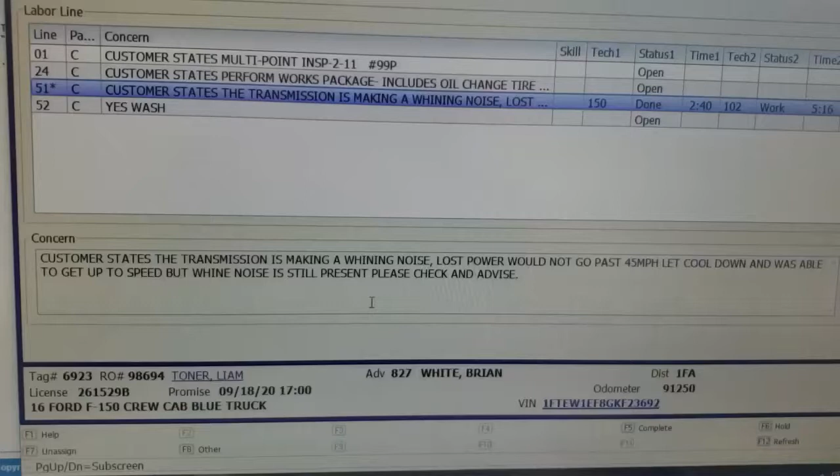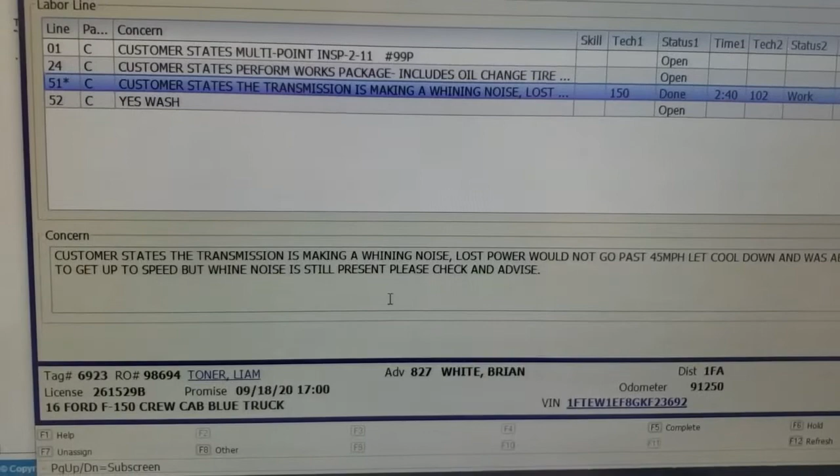Okay, so today we are going to look at a truck. The customer is complaining of all kinds of weird transmission concerns, won't go over 45 miles an hour, whining noise, and all that. The transmission guys already looked at it and decided that there's something wrong with the engine. So we're going to investigate that here for a minute.

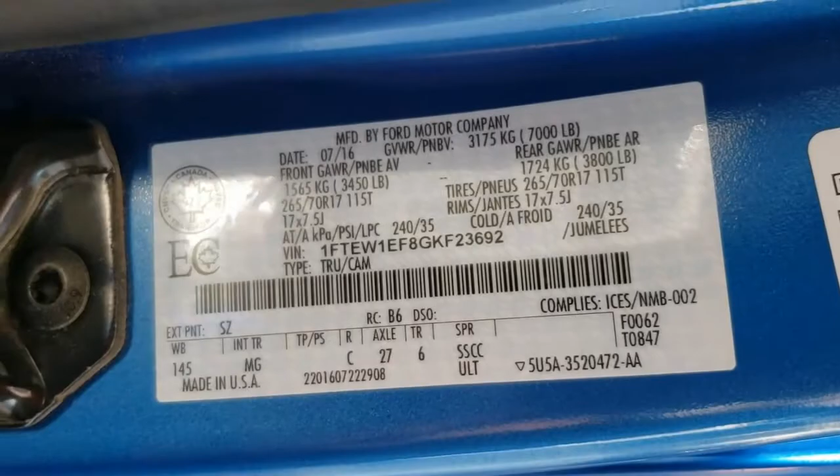Like I said, it's a 2016 F150. There's the VIN tag for your test sheet. And she has 91,253 miles on her.

So where I wanted to start with this truck would be we want to pull codes, and I thought that today would be a really good day to take some time, and I'm going to show you how to hook up the IDS and what the IDS is all about. IDS stands for Integrated Diagnostic System. In other words, we're integrating all kinds of different things into one diagnostic tool.

We have the ability with this unit to just pull codes and look at PIDs and look at stuff in the computer, but we also have other units that we can hook up to this system so we can check pressures and voltages and all kinds of different things. The purpose of this class is not to try to teach you everything about the IDS itself, but I wanted to give you guys a rundown for you guys who have not done this before.

So let me start with a hookup, and then we'll come back around here and we'll talk about how to program it into the computer.

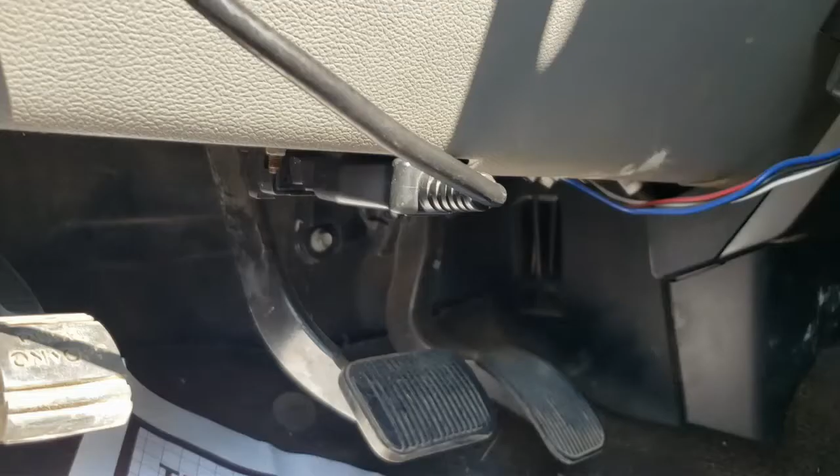So from inside the vehicle, every vehicle built since 1996 is going to have what they call a DLC connector. That's a data link connector. It's a 16-pin connector. It's the same connector for all manufacturers. Not all the pins are the same for every manufacturer, but there are certain pins that are, and we can discuss that in a different class.

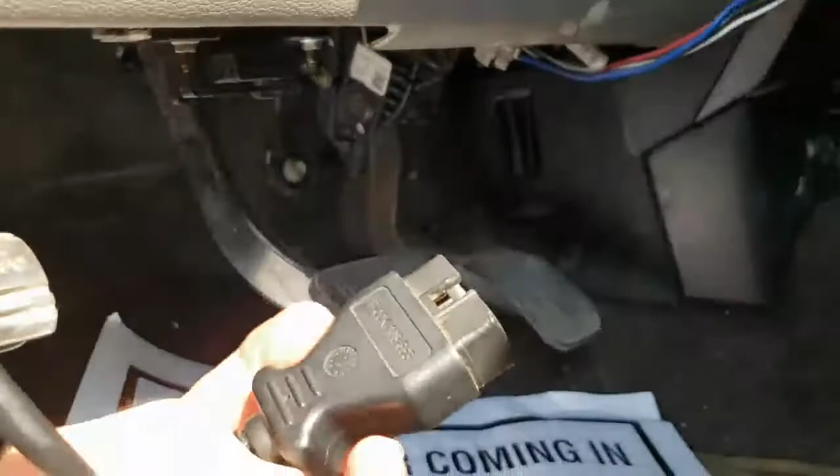But we have the connector here from our IDS system. We're just going to simply plug that into the car. We're going to turn the key to on, which I've already got it on, and then we're going to go out and I'll show you how to boot this thing up on the car.

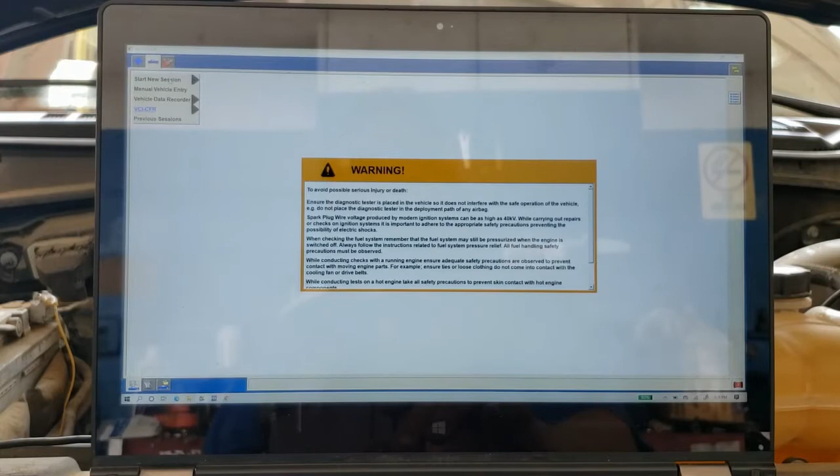Okay, so it's really simple. All we're going to do is we're going to come to start a session and all other vehicles, and enter. Wait for it to do its thing, and it's going to boot itself up on the car.

Okay, it'll pop up and say what car it's booting on up to, and then it's going to ask the question, is this correct? If it's not, it's going to assume that there's something wrong with the programming and kind of take us down a different route, but we don't really care about that right now. We just want to hit yes. This is the car that we're looking at.

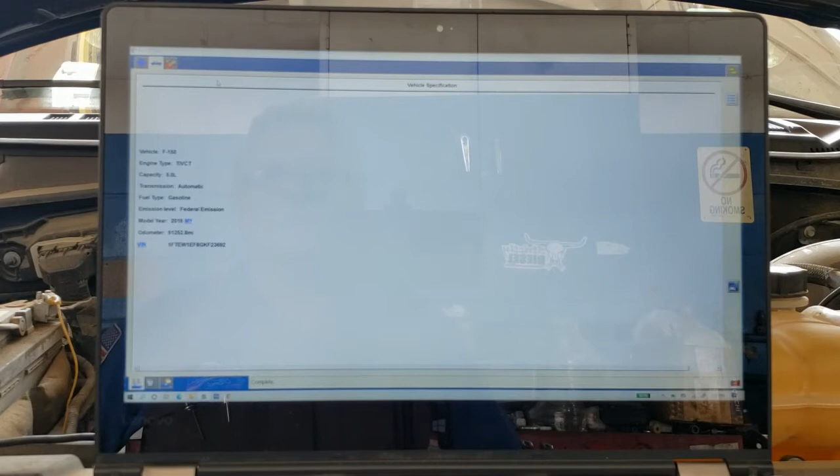Okay, so now we're booted up on here, and you can see that it is an F150 with a 5-liter with the TI-VCT. That's the type of VCT controls that are on there as far as variable cam timing. It's federal emissions, in other words, it's not a California vehicle. It's a 2016, and it shows the mileage and the VIN number.

Okay, so from this menu we can pick the toolbox, and we have lots of things that we can choose to do with this car. Easiest of which is just to do self-test on the vehicle. We can self-test all the different modules, or we can do a continuous code or continuous tests to all the modules, or we can come back up here and we can look at the data stream and see what's happening with all the different parameters in the car. We'll cover that a little bit later.

We can monitor the network. We can program the module. We can do network tests. We can do all kinds of powertrain tests, which we'll get into later on this semester. We'll cover some more of these. But for the purpose of this, I just kind of wanted to show you how to boot up on here.

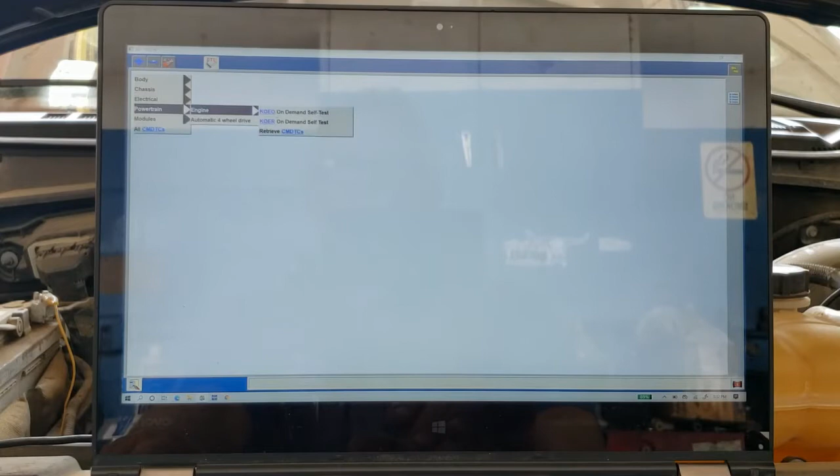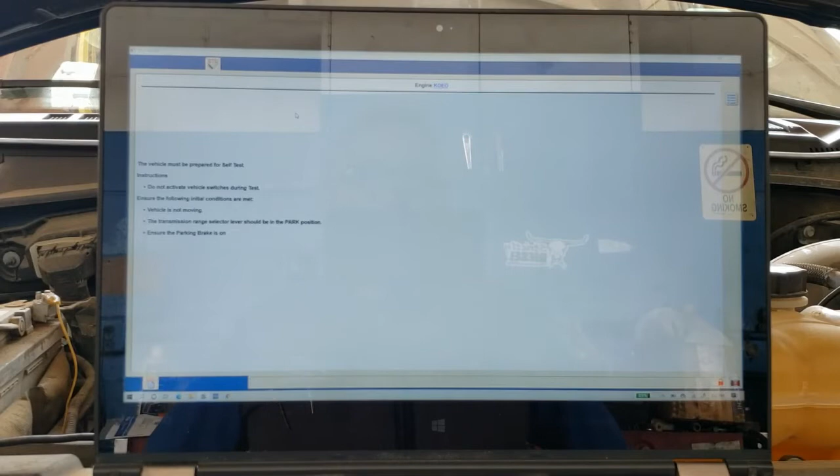So what we want to do right now is we're going to do a self-test. And I want to do a self-test particularly right now on the engine itself. So we can choose on-demand self-test and hit enter, and then it's just going to have us go through a series of preparations for the vehicle, make sure that the AC's off and nothing's in gear and that the car's not running and that kind of stuff. It'll just tell you what it wants to do. So now we're going to go through a self-test.

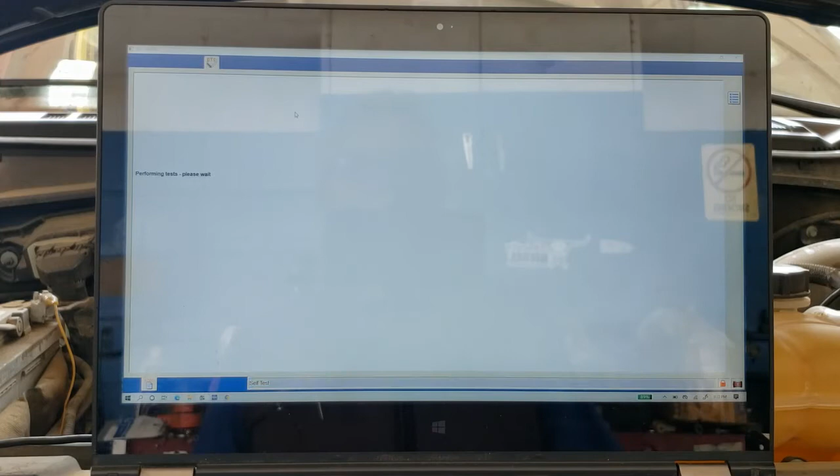Okay, you could hear it ran the cooling fans during the self-test. It went through a whole series of stuff inside the dash. But here we are, and what did we end up with?

Well, obviously I didn't turn the air conditioner off, because the top code here is the AC was on, so we can ignore that. But we have a continuous code P06DD, which says the oil pressure control circuit performance is stuck off.

Now we need to go to the workshop manual. We're going to work through that particular pinpoint test and find out what that means.

Up on the top, when we do our IDS self-tests, it's going to show us if this code has any TSBs associated with it. It's going to pop them up so we automatically know there's a bulletin on this, some kind of problem that Ford knows about.

But if we just read the literature on that, it says 2016 to 2017 F150 with a 2.7 engine. But as we recall, this car is a 5-liter, so we know that this technical service bulletin does not apply.

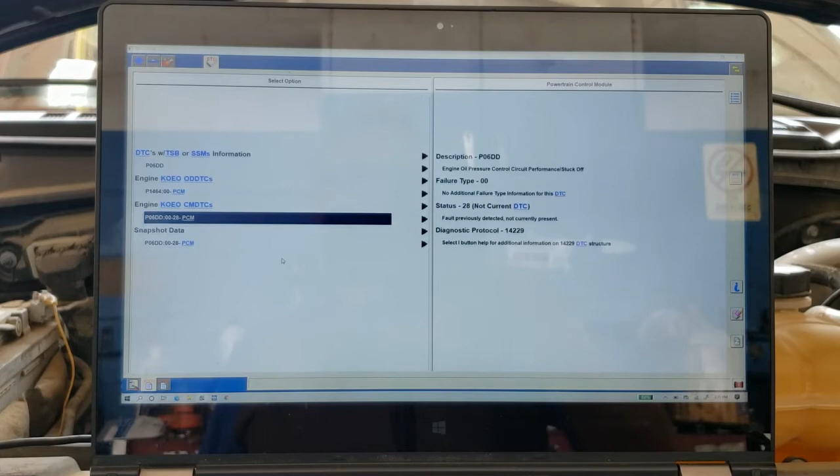We want to make sure it's got oil in it, make sure there's no giant oil leaks, that it's got coolant, and just look for anything obvious, no rat's nest any place in here, anything like that. So let's pause it and do a little visual inspection.

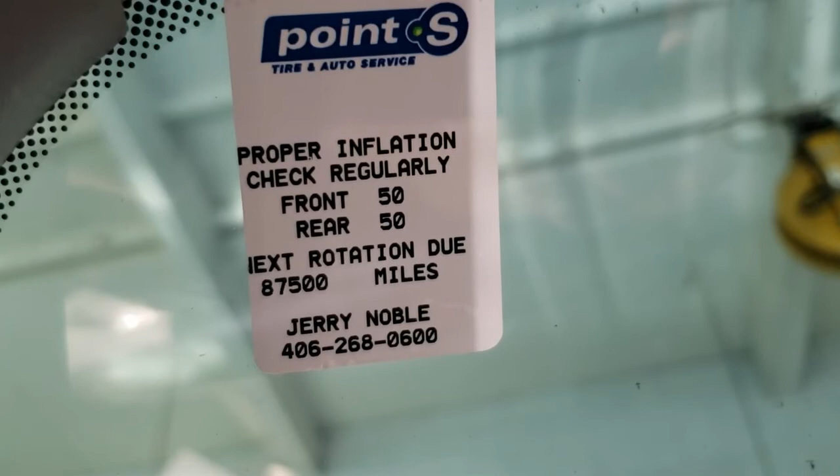So in the visual inspection, one of the first things we notice is it has an oil change required message on the cluster. Okay, so that's a clue that maybe this thing's past due for an oil change and its maintenance. Next thing we notice is the oil change due sticker says 87,500, which makes it about 4,000 miles past due for an oil change.

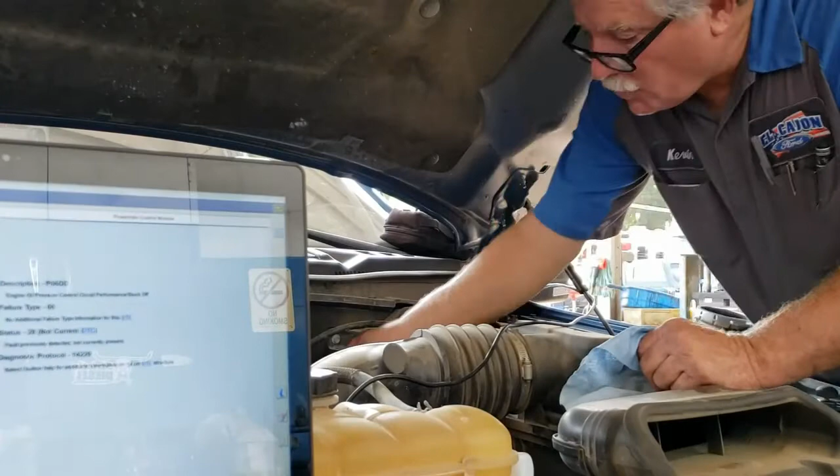So one of the first things we're going to want to do is climb up here and check this oil level out, because it's obviously really past due. Let's check the quality of it.

So when we check the oil, we're going to pull the stick, wipe it off, and drop it back down in the hole again.

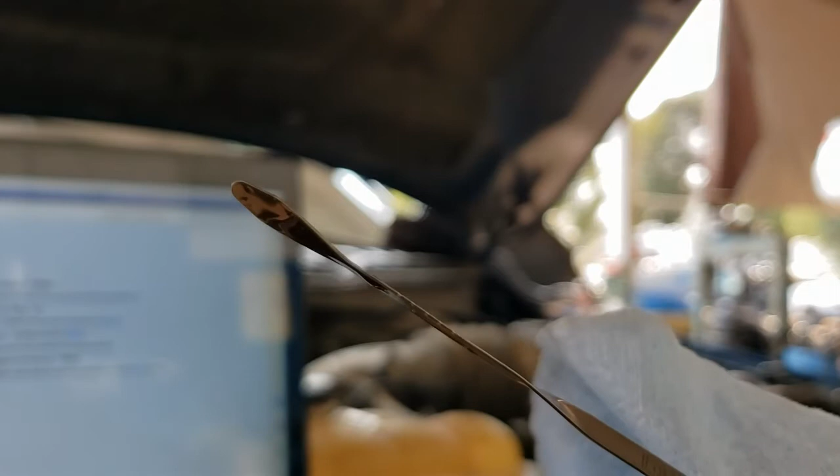We're going to see that it's really low on the stick here. I think you can see that. Let me try to focus in on that a little bit. There we go, how about that? You can barely see any on the end of the stick there, okay? So that's not a good thing.

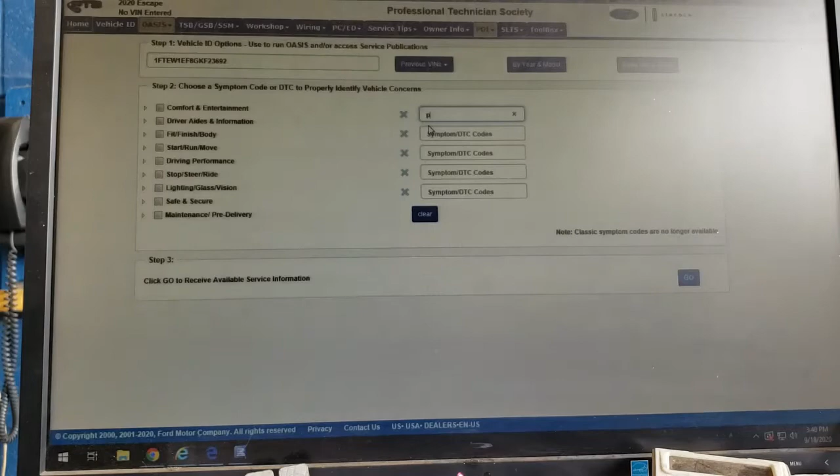So let's continue on with this visual inspection. We're going to look up in the PTS website what's going on with this P06DD code. This is the home for the PTS website. We're going to come up here, pick a vehicle, drop the VIN in, and we can put that code back in here, remember? And what that's going to do is pop it up.

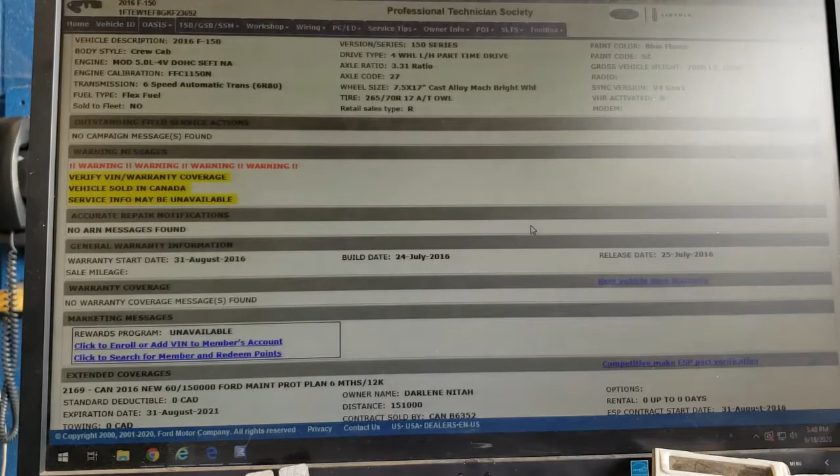Okay, so some other things we're going to find on a visual inspection about this car is it's a Canadian vehicle, not an American vehicle, which doesn't usually affect us too much, but it may have some warranty things we need to be aware of.

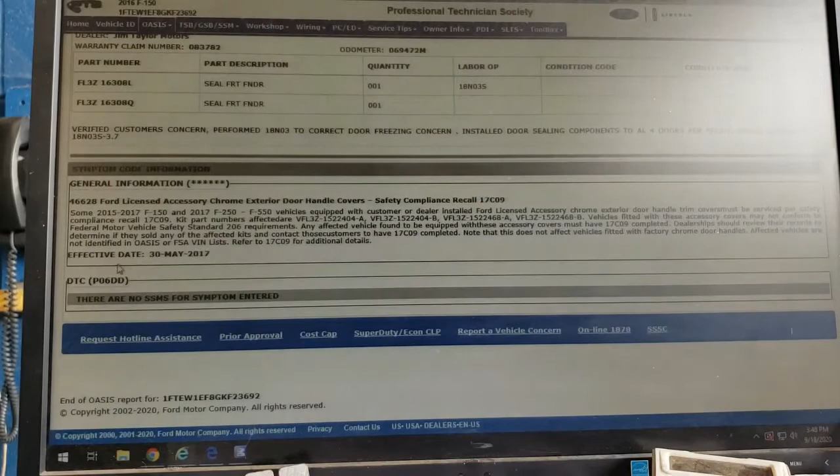But we can come down here to the bottom and look up that code. Remember, that code had a tag on it in the IDS that said there was a TSB involved with it, but this system realizes that this car's got a 5-liter, so it doesn't have anything to do with it. Okay, so the PTS website is going to tell us everything about the car. It's a '16 F150, it's a crew cab.

It is a 5-liter modular motor. There's the engine calibration. It's going to tell us what transmission's in it, a 6R80. It's a flex fuel vehicle.

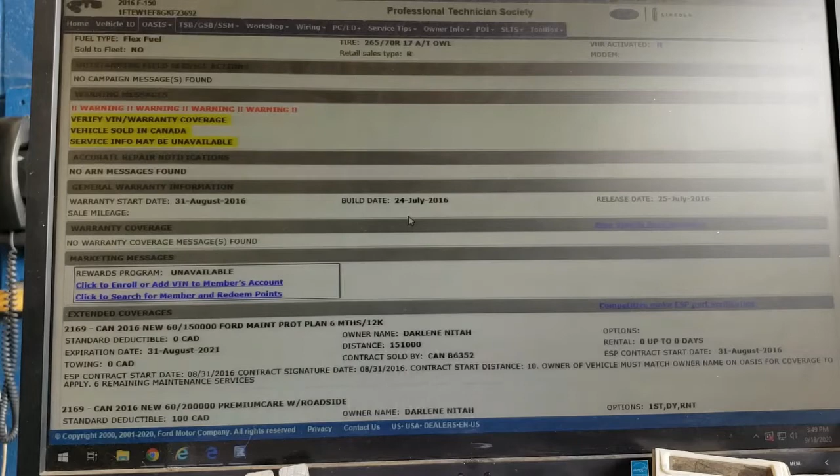It's going to tell us it's an F150, 4-wheel drive, axle ratio, tire sizes, paint color, all the information we need to know about it. We can find out its warranty start date, when it was birthed, when it was built.

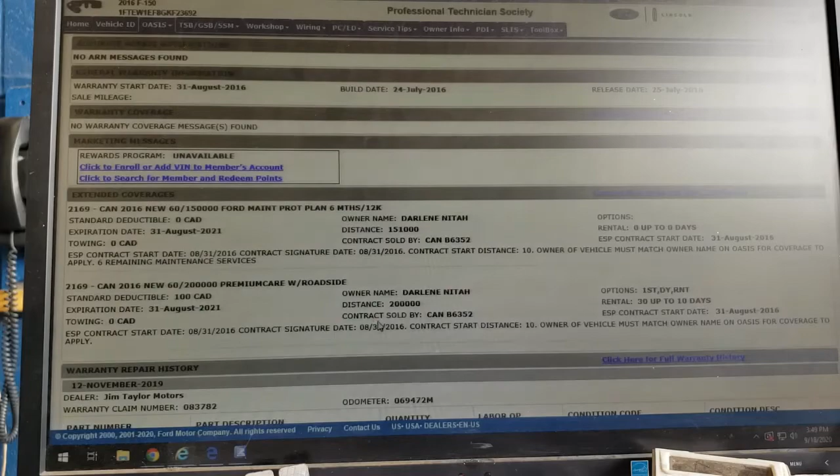We can also find out if there has been any warranty history, and we can see what's up with that. We can tell all kinds of things about it in here, so it's a really important page for us to get familiar with.

Okay, so we're going to come here to the PC/ED, and we can choose diagnostic trouble code charts. We're going to come on down here and try to find P06DD, and it's a good chance that it might be in the engine and not in here.

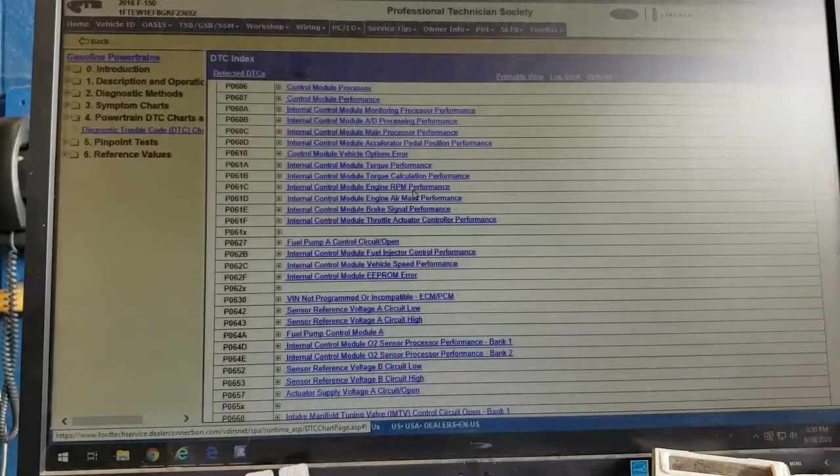P06DD, some more, P06D1, no. Okay, so it's not in here. So we're going to have to come over here, go to the workshop manual, and we're going to go to engine, and we're going to have to come down here to engine, electronic engine controls for a 5-liter, and see if it's in here.

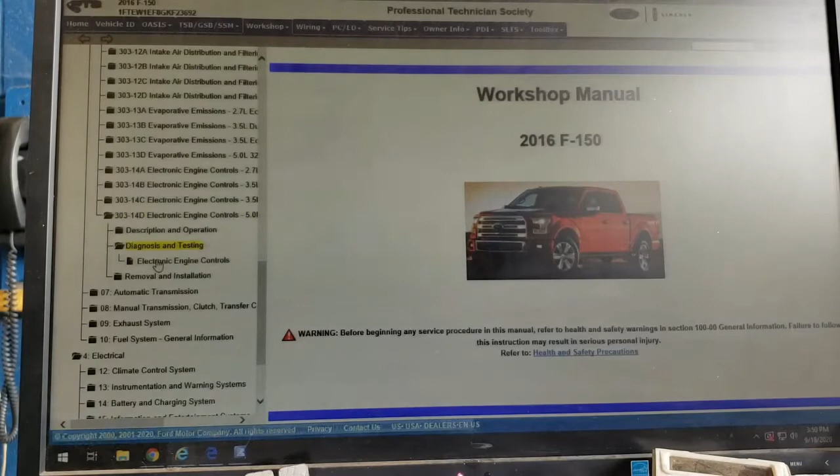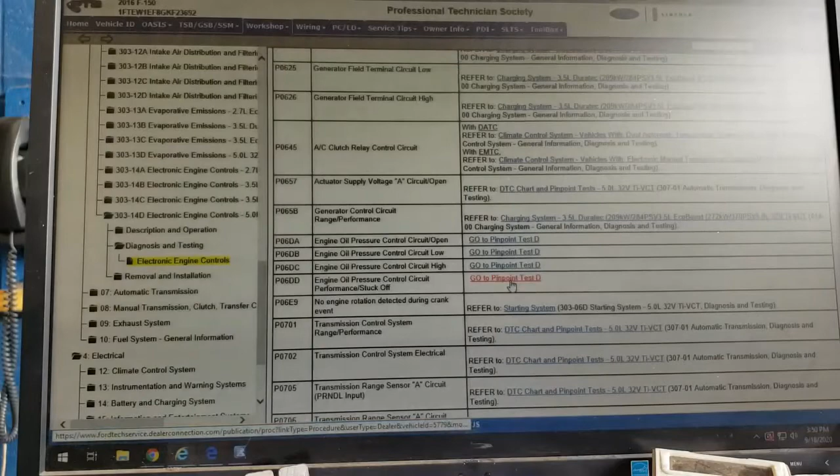And this should pop up. Diagnostic trouble codes in here. P06DD, engine oil pressure control circuit stuck off. Okay, so it's going to take us to go to Pinpoint test D. If we pop up here a little further up, we can get a description of what this code is.

It says oil pressure control solenoid faults. It tells us to refer to wiring diagram, and that's pretty much its description. If you come down here to the actual code, it says this sets when the PCM detects the oil pressure control solenoid valve is stuck.

Okay, what this engine has is a variable oil pump solenoid, so that we can reduce oil pressure at higher RPMs to reduce the load on the engine, give it better gas mileage. So it says possible sources could be a stuck solenoid valve, a bad PCM, or wiring or terminals.

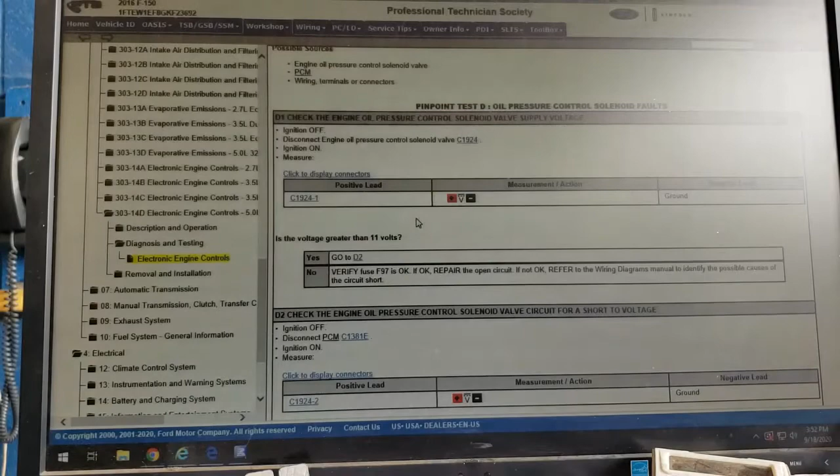So it's going to have us go through a series of tests. Key on engine off, disconnect the oil pressure control solenoid valve, and then measure the voltage on it. We're going to go through this pinpoint test and see this happen. So let me pause this for a minute and we'll take it back over to the vehicle.

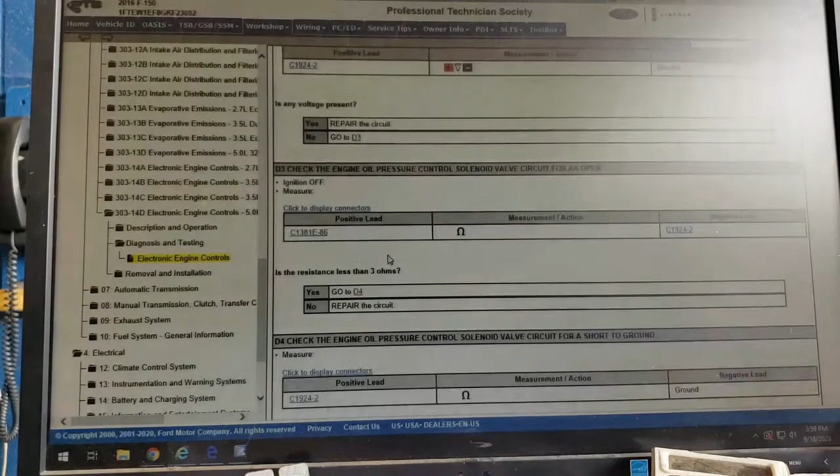Okay, so we've gone over to the car and we've checked all its circuitry. I'm not going to teach you all the circuitry tests and everything like that, but we had 11 volts, so we wanted to go to D2, and it wants us to check for any shorts to voltage on those lines or anything like that, and we had 0 volts. We just answered a series of these questions. We have no resistance in the line, and we have no shorts to ground or anything like that.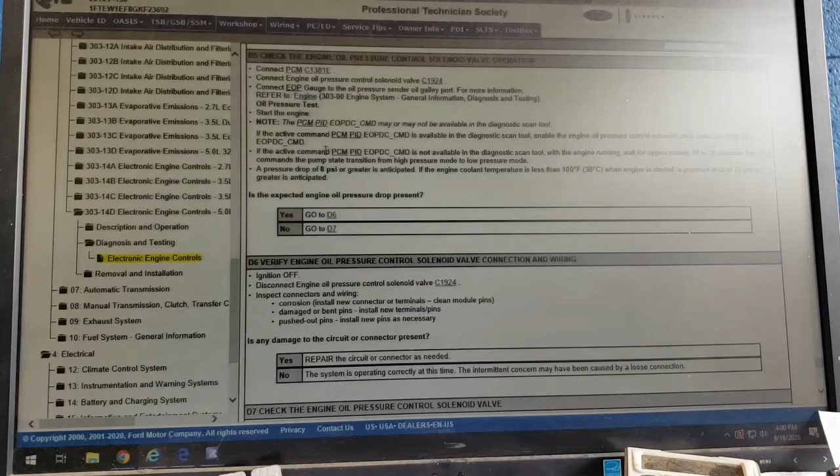So we want to focus in here on D5, which tells us what it wants us to do is go in and start the engine. We're going to look at some PID data on the computer and watch the oil pressure on this engine and see if we see this pressure drop. What we're doing is seeing if the computer is actually controlling the engine oil pressure, and then we'll make a decision from there. So let's go back over to the car and watch that.

Okay, so we're back over with the IDS. What we're going to do is look at a series of PIDs. Or actually just one PID on this car. So what are PIDs? We're going to look in the data logger, and PIDs is what we refer to as parameter identification numbers, or information that we're going to watch.

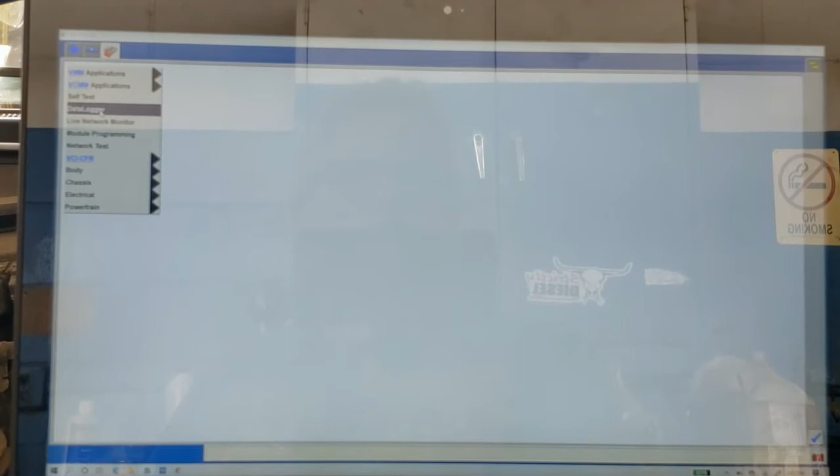So we're going to open this up. We're going to look in powertrain. We want to look at the engine.

Gonna let it boot up on here.

This allows us to look at many things inside this engine, what's going on. We can see voltages, percentages, throttle positions, temperatures, an endless number of things we can watch in the computer and see it monitor itself.

These are all a big list we can look through, but we want to just look at one thing. So we're going to clear these out, and look at the oil pressure PID, EOP, which is engine oil pressure.

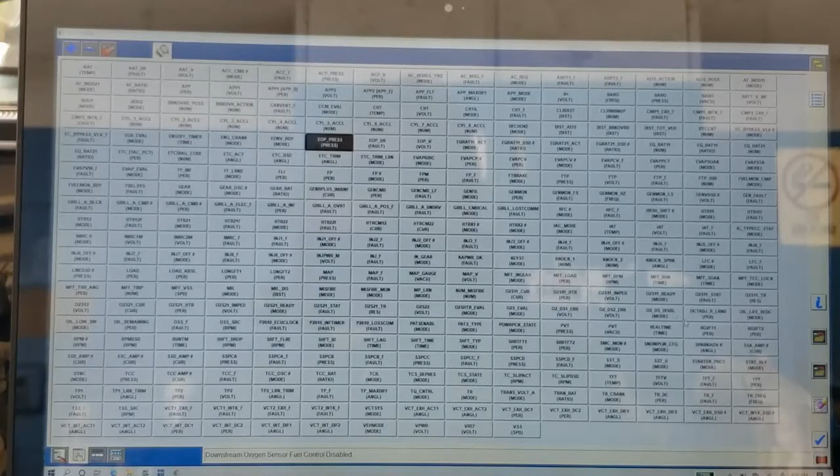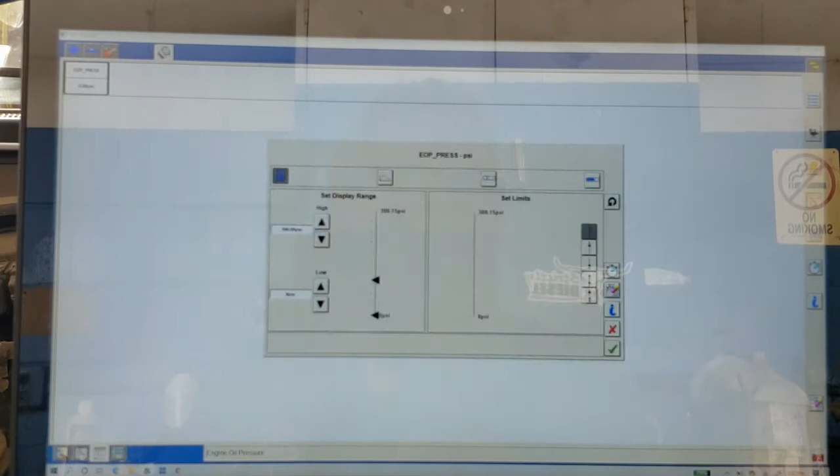We're going to watch this pressure, and it wants us to turn it into a graph. Let's watch it on a graph, it'll be easier to watch.

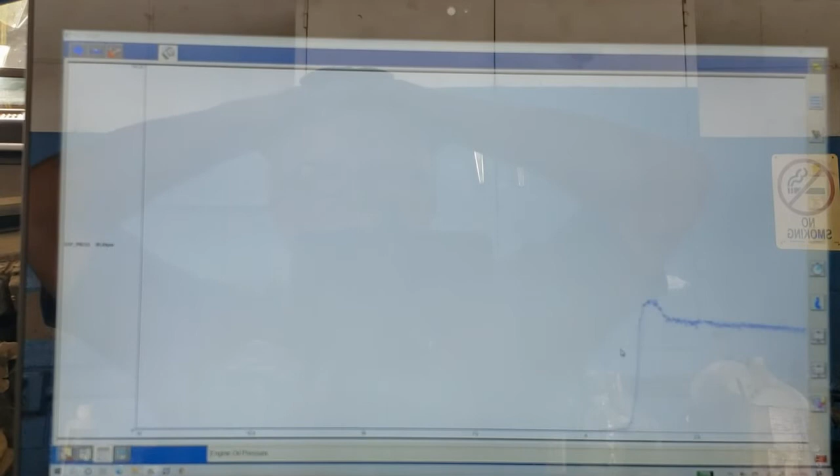I'll get our trusty assistant Jay to start the vehicle. It said to start the vehicle and watch the engine oil pressure PID. It says we should see a drop of about 8 psi within 20 seconds. So let's watch our oil pressure PID.

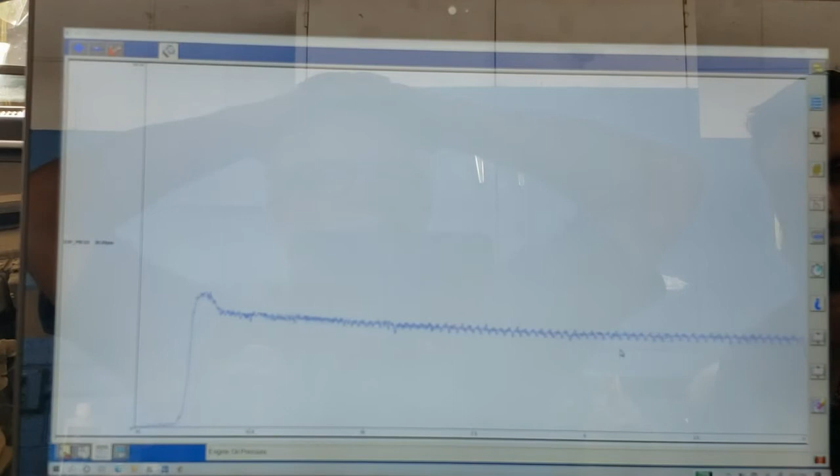And there we see our drop. So our answer to the question was, is this working? Yes, it is working. That's where we're just verifying everything's working. Okay, we're going to turn the car off.

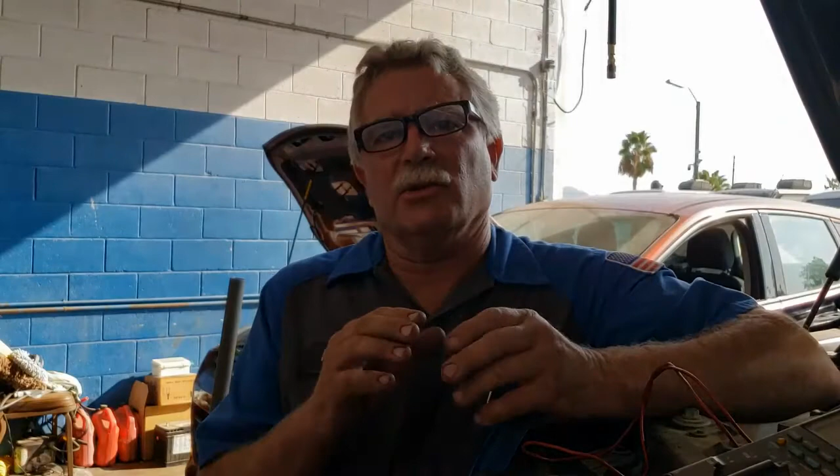This is an example of a situation where the code and the pinpoint test takes us down a line that says something's wrong with that solenoid. Because the only way the computer knows if that solenoid's working is by watching the oil pressure, and seeing it where it wants it to be. Now the circuits all test out good in this car.

The next step in the pinpoint test was to unplug that solenoid again and inspect those connectors. Well, we've already inspected those connectors, already unplugged that solenoid, and checked voltages and grounds to it. So we know the solenoid isn't suspect, the connections, the circuitry, that's not a problem. It's working well, right now it's working just fine. So what in the world's going on with this car?

That's where we have to look at everything as a whole, what's going on with this car. That's where the visual inspection came into play. Remember, we saw this car needs an oil change. We looked at the lube sticker, and it says this car's 4,000 miles past due for an oil change. So if that oil change was set at 5,000 miles, that means this thing's gone pretty near 9,000 miles without an oil change.

In a modern engine today, they can't take that for two reasons. One, it's going to use some oil, so now the engine's practically out of oil. And two, it's going to sludge up that engine, because that engine oil's purpose is to lubricate, but it's also a detergent, carrying away all the contaminants happening in the blow-by from the crankcase or combustion past those rings. That oil is responsible for carrying it all to the filter. So now you have a filter that's getting really plugged up, and an all-around mess.